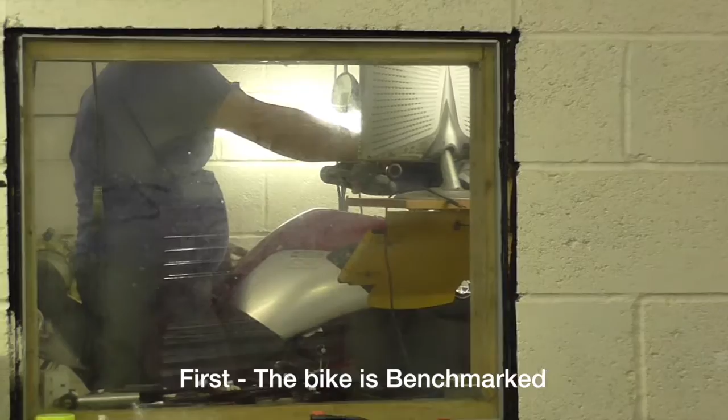Right, it's actually above average. It's producing 87.23 brake horsepower at the rear wheel, 68 foot-pounds of torque.

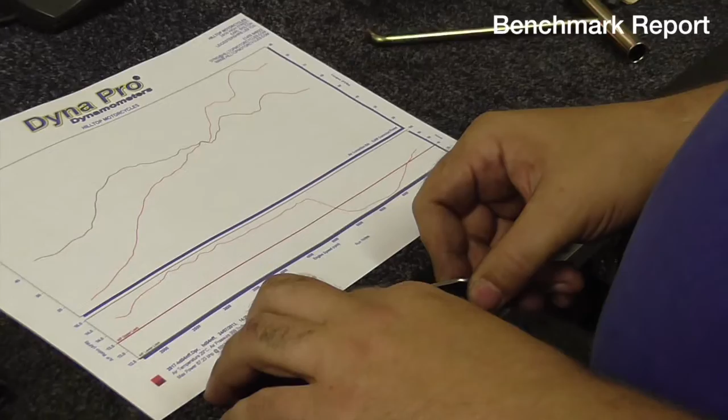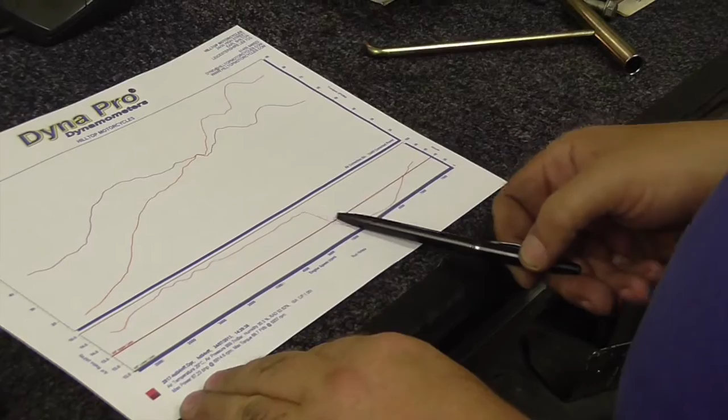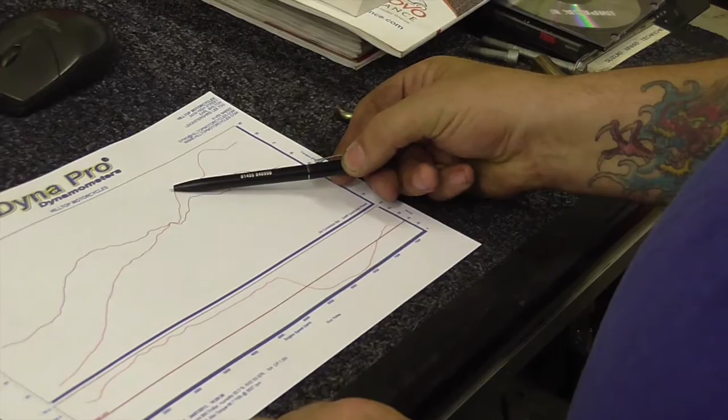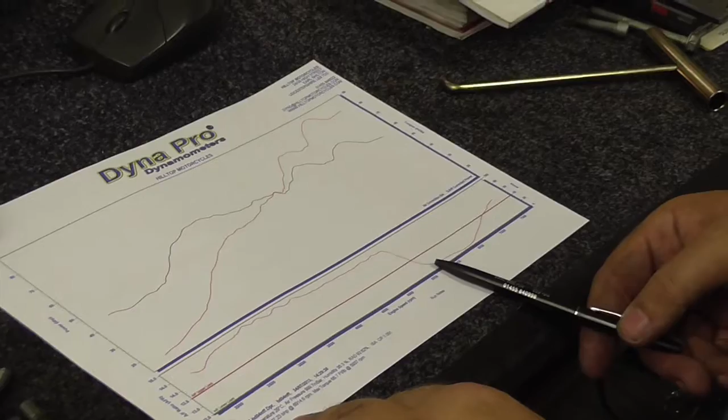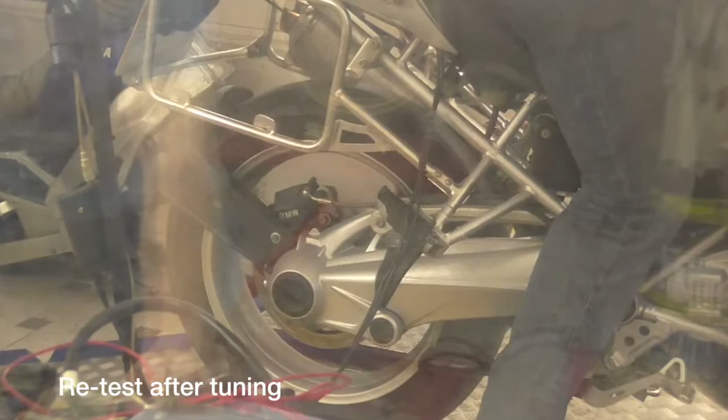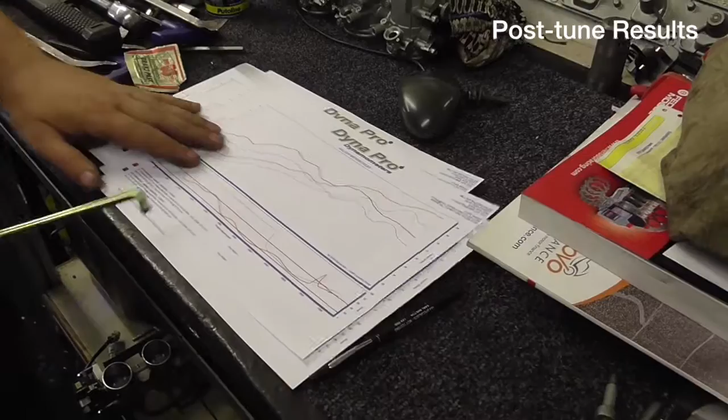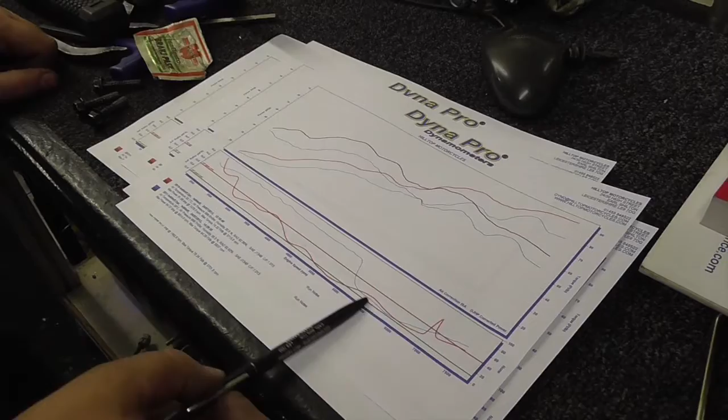There you go, it's self-explanatory. It's got some lines on it. These are all sixth gear roll-ons. The blue line is what you came in with, the red line is what you have now. This little spike that you've got at the end isn't a spike, it's basically the sniffer moving in the exhaust.

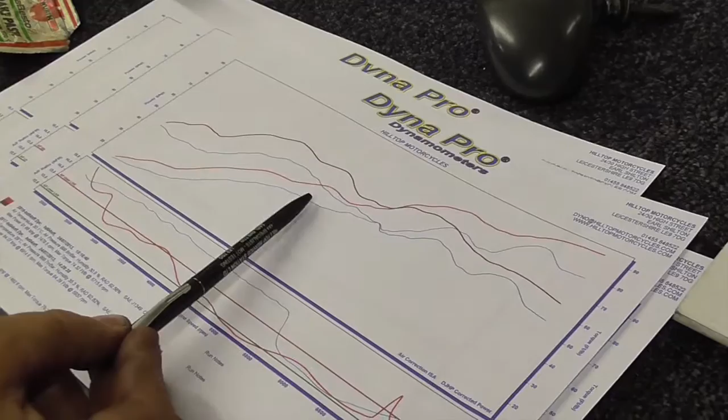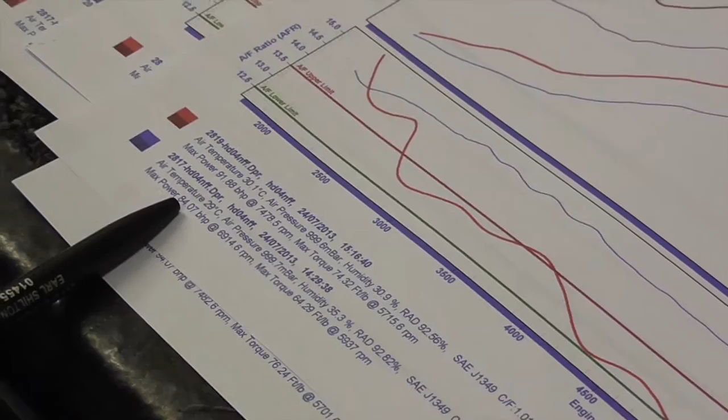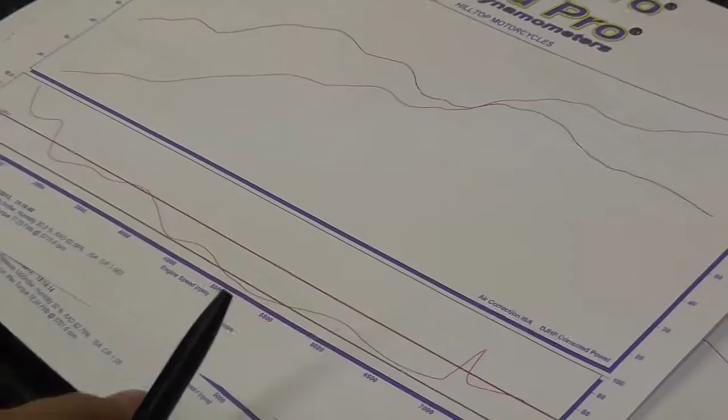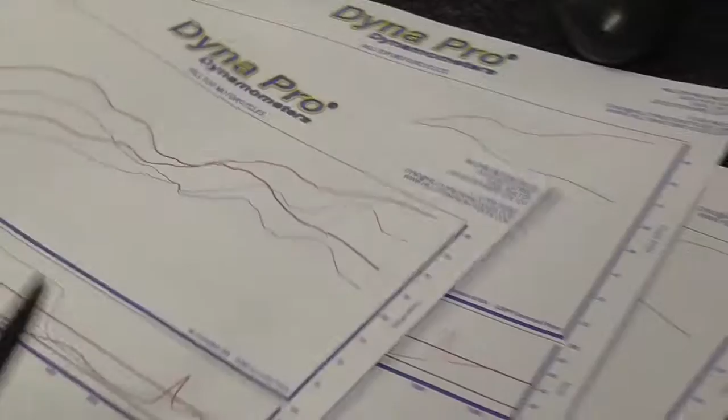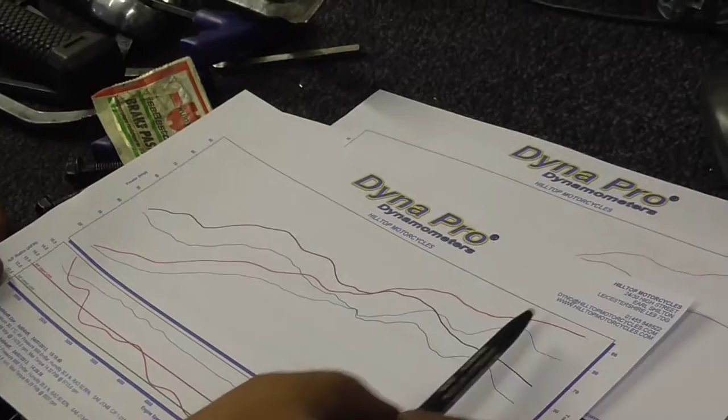As you can see the lifts in it, it's expanded the torque - this is your torque across the top. It's expanded the BHP, you can see it's much more streamlined and more linear. You haven't got the sudden lifting power at the end of the rev, it's more or less straight through.

I've now got this R1200GS 2004 bike, which looks very similar to the other one in that it's red, but it's obviously a different model, a different bike, and you'll be able to see in the video that I've just put up that I've had it remapped to give it a bit more power, and that's worked remarkably well. So I've got pretty much the same things on it. I've got the aluminium luggage on there that I had on the previous bike. I've got the stock seat on this one, and I'm perfectly happy with that.

I've got the BMW tank bag, which is again very useful, particularly if you're going to go any distances, or if you just want to put your bits and pieces in there. And it expands larger as well, very similar to the tank bag that I had before. So the bike's very similar in many respects, but as I say, it's a 2004 model, so it is a little bit older, and of course you notice that when you're riding it, but actually with the remapping having been done on it, I have to say that it is a completely different bike.